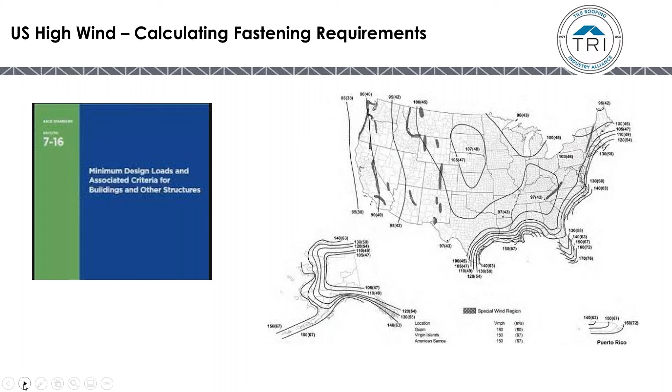For the rest of the country, other than Florida, including Alaska and Hawaii, we are still using the TRI concrete and clay installation guides, and they are still based on 7-10. There's a reason for that that goes into the International Building Code, but they have not made tables for ASCE 7-16.

So if you're outside of Florida and you want high wind, then you can go ahead and use this manual and use the existing 7-10 tables. They also have 7-05 tables in there, and on pages 77 through 98 are 20 pages for you engineers out there of really good engineering for both ASCE 7-05 and 7-10. It's quite chock full of how roof tile uses an uplift moment instead of a pressure, and how you calculate your fastening resistance to the requirements based on what kind of roof you're putting on.

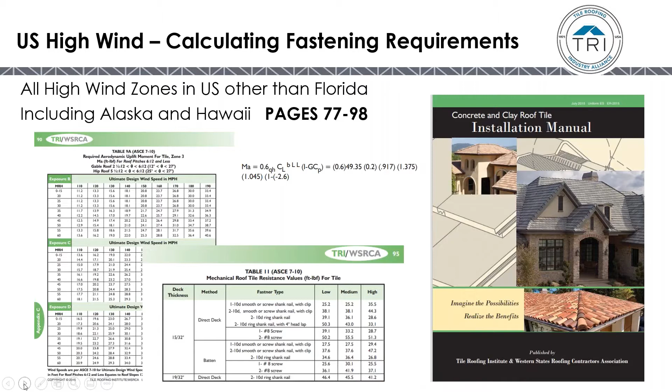That being said, there are other high wind fastening options, and the most popular or the best known outside of the Florida code is the Miami-Dade code. Miami-Dade is basically a code for a given wind speed, 175 miles an hour, and it uses its own installation instructions, described in their roofing application standards, RASs.

You have RAS 118, which is direct to deck, RAS 119, which is a batten system, and RAS 120, which is a foam adhered system. They take the data and have converted it to ASCE 7-16 and put it in a wind table under RAS 127. They then require us tile manufacturers to put in approvals, and not only put in for approvals, but test quarterly our tile to make sure we meet all of their standards.

So it's quite specific. I know in other parts of Florida, engineers and building designers and architects are saying, hey, I don't care about the Florida code, I want you to do my house up in northern Florida using the Miami-Dade product approval. And that isn't equal to the Florida product approval. I'll show you that in a minute.

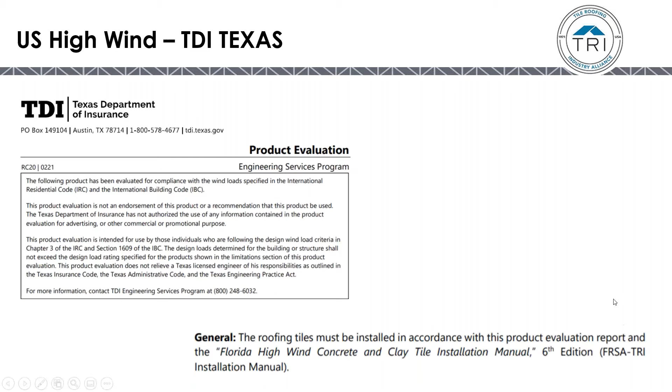And that's the Miami-Dade code. So what I'm showing you here is in Florida, you've got to install to the 6th edition Florida High Wind Guide from the TRI and the FRSA - the FRSA is the Florida Roofers, by the way - or the Miami-Dade code.

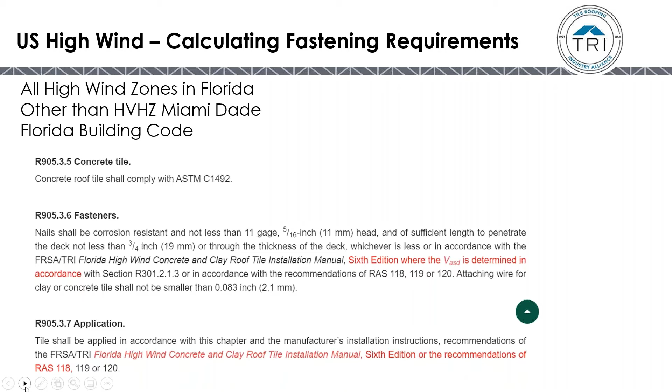For you design professionals, the 6th edition does have 3 pages of formulas and how we figured out how we came across with our tables and such. So it's good reading if you understand all that, but it's in the book on pages 18, 19, and 20.

By the way, you can download the FRSA TRI 6th edition from the TRI website. Just go to installation manuals. And not only do we have the 6th edition, which became effective January 1st of this year - well, actually December 31st of last year - but we also have the 5th edition still there if you want to see, like for instance, a building you did last year, that you would use the 5th edition for.

That would be ASCE 7-10 in Florida, or you could use the 6th edition, which is ASCE 7-16.

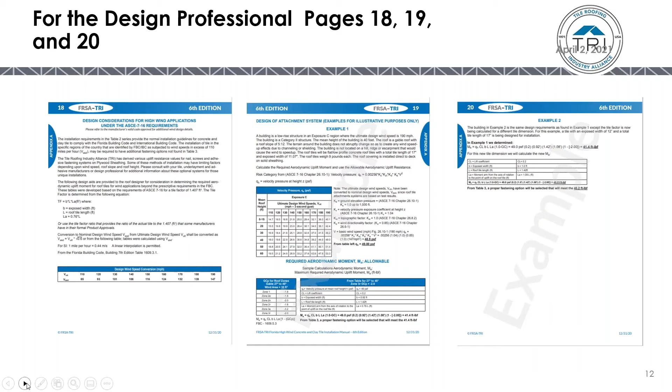The difference with the ASCE 7-16 is the roof zones. In ASCE 7-10, we had 3 wind zones. In ASCE 7-16, we have 10 zones, and the fact that the gable roofs are different than the hip roofs.

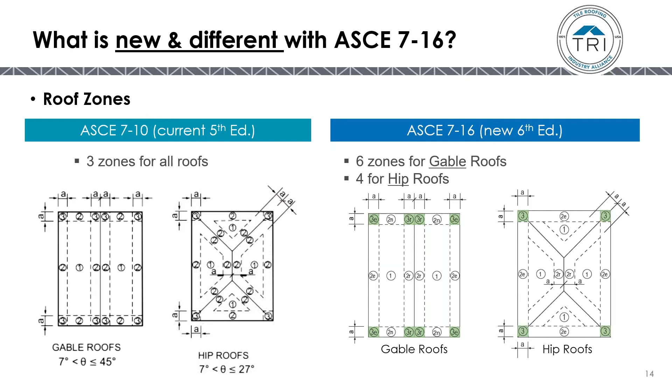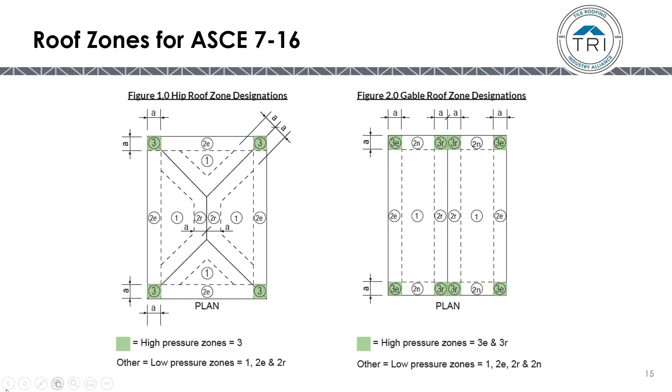The hip roofs have the corners, the 4 corners of the hips, at a higher pressure - this is a better example, I have the high pressure zones - and the gable roofs have 2 different zones: the bottom of the gable and the top of the gable. So that's zone 3E and 3R, and the low pressure zones 1, 2E, 2R, and 2N. So just letting you know this before we go into our examples.

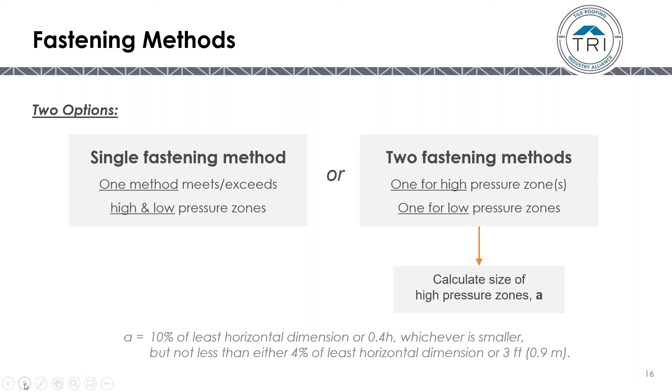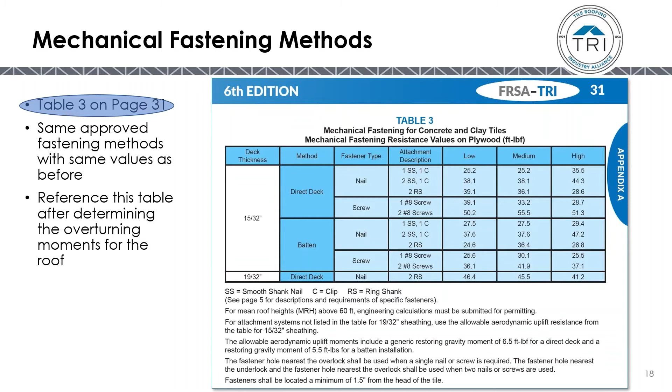All right, let's use the 6th edition and do some examples. It's all based on table 3. We're talking about fastening. So we did testing, taking tile and taking the 3 different types of tile. What we mean by types are profiles: a low profile, which is a flat tile, a medium profile, which is a double roll or small rolling tile, and a high profile, which is the one large hump, typically Spanish type tile. We did uplift tests on that, and we came out with uplift pressures, and those are listed in table 3.

Foam is not listed there. Foam came in after that testing, and they have their own uplift moments. So when you calculate your resistance, what you need, you then go to the foam companies and see what resistance they offer based on patty size and patty placement. So we won't spend too much time on foam, but more and more people are using foam, especially in the higher wind calculations.

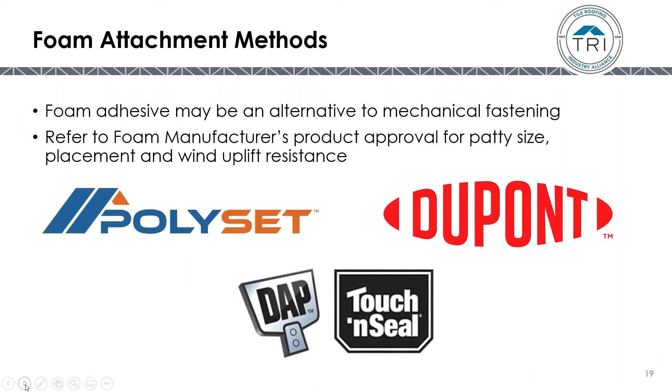Now the tables - we have 6 tables now, 3 for hip roofs, 3 for gable roofs, for each exposure. Exposure B, which is a well compacted area, a very close city area. Exposure C, which is a normal area of housing. And exposure D means you're right on the water. The 6th edition has those exposures defined in the back in the glossary, but for 99% of our roofs, which are exposure C, that's what we're going to talk about today.

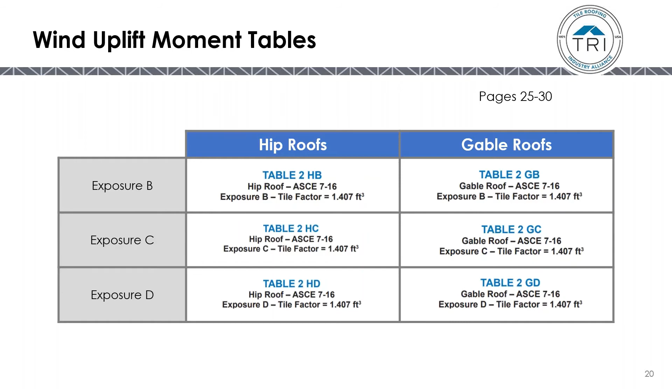Here's what we need to know to do our fastening determination. We need to know if it's a hip roof or a gable roof. We need to know the exposure we just talked about. We need to know the roof pitch. Then we need to know the wind speed. Then we need to know where our low pressure zones and our high pressure zones on that roof are. We need the mean roof height, the halfway point between the eave and the top of the ridge.

Then we need to know what tile we're going to use. We have to look at the tile ratio. I'll get into that in a minute. And then we're going to have to figure out how we are going to fasten it. Are we going to use nails? Are we going to use screws? Or are we going to use foam?

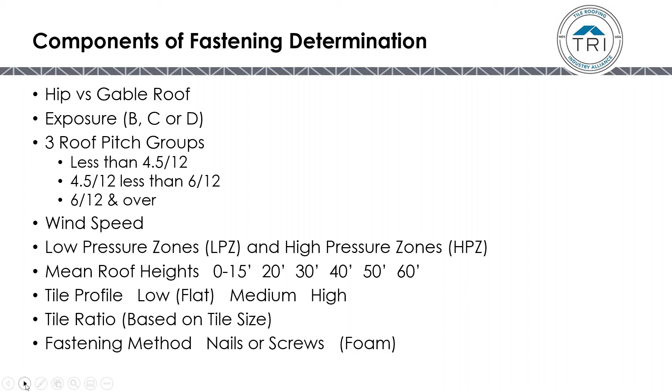Okay, here's an example of the tables. As you can see, the tables are 2HC, 2GC. The difference is the table on the left is a hip table and the table on the right is a gable table. So again, you'll have to look at the roof to determine that.

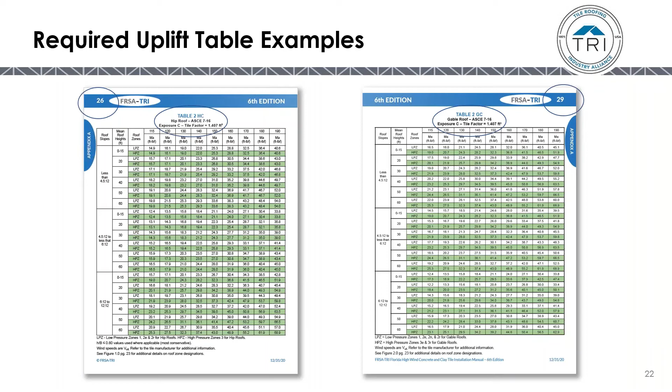So let's look at 140 miles an hour. Here's the example we have for 140 miles an hour, and that includes the mid part of Florida. I didn't want to go too low a wind, and I didn't want to go too high, so I took the medium speed wind of 140. Well, probably some of you people out there think 140 is not medium. In Florida, it's a medium speed. But if you're living in a 90 mile an hour wind zone, that's pretty high.

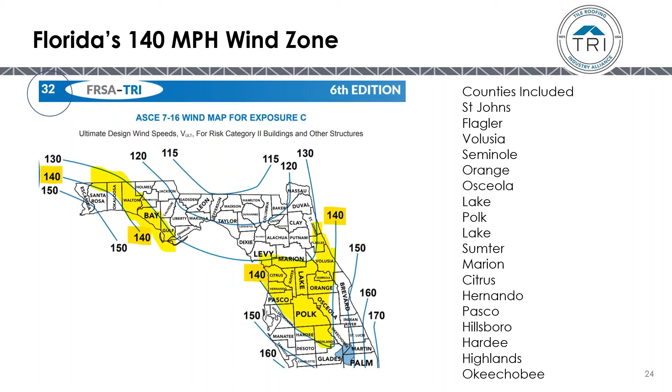But let's do some examples so you can see how this flows. We're going to do exposure C. We're going to do a tile ratio of 1.1. We're going to do 3 hip roofs and we're going to go 3 gable roofs. The 3 hip roofs are going to be at each slope range, and the 3 gable roofs will also be at that same slope range.

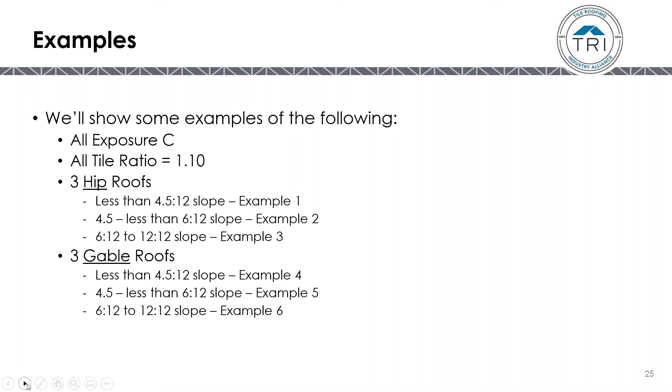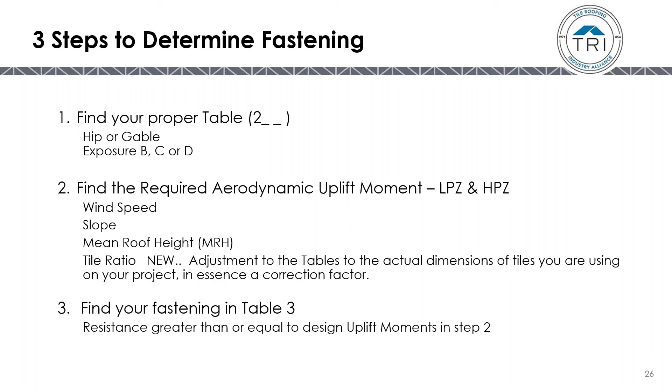Okay, there's 3 steps to fastening. Find your table - figure out if it's the hip table or gable table. Find your uplift moment, and then find your fastening resistance in table 3. So let's start by finding your table.

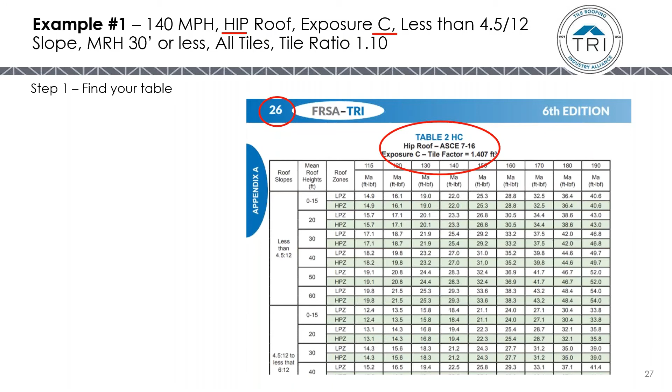If you look up top, example 1 is a hip roof, exposure C, at 140 miles an hour, less than 4.5 on 12, with a tile factor of 1.407. Time to talk tile factor. The tiles used in the testing were a certain size, and we found that tiles will over time get bigger because there are fewer pieces per square. So there comes a point where you'll have to factor in the larger tiles, and I'll show you that.

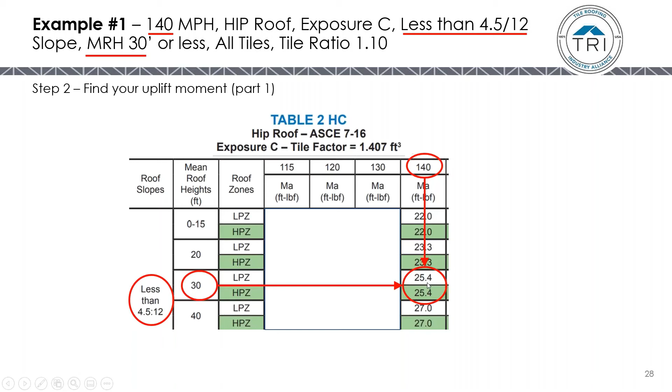But at 140 miles an hour, at less than 4.5 on 12 roof slope, and let's say we have a 30-foot mean roof height, both our low pressure zone and our high pressure zone are the same. That's kind of common in a lot of lower height roofs. So we have to find a fastening system that's going to offer 25.4.

So before we do that, we're going to have to look at the tile ratio, and let's look at the biggest tile out there. Now, a smaller tile would actually give you a lower uplift moment, whereas let's show you an example of the higher one - it takes that 25.4 and moves it to 27.9.

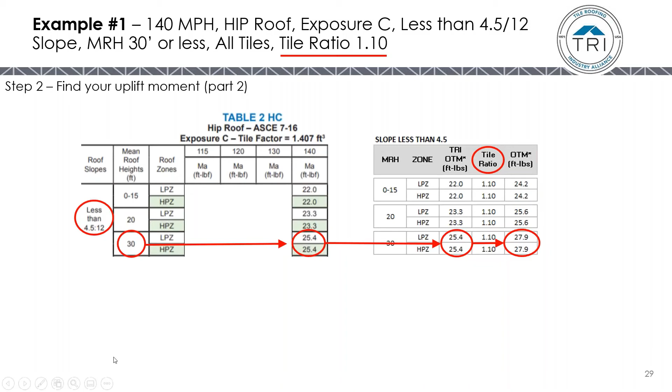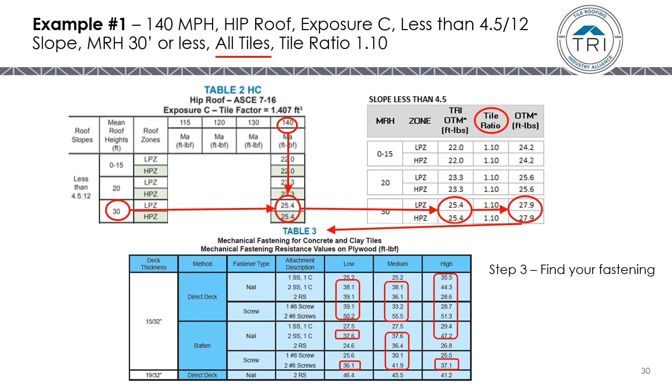All right, so in example 1, 140 mile an hour, less than 4.5 on 12 slope, tile ratio 1.1, we had to meet 27.9. We go to our table 3 and direct deck. Okay, we look at what fastening methods will meet that 27.9, and there they are all listed depending on your profile, your tile - 2 ring shank. Ring shank nails will meet all 3 criteria.

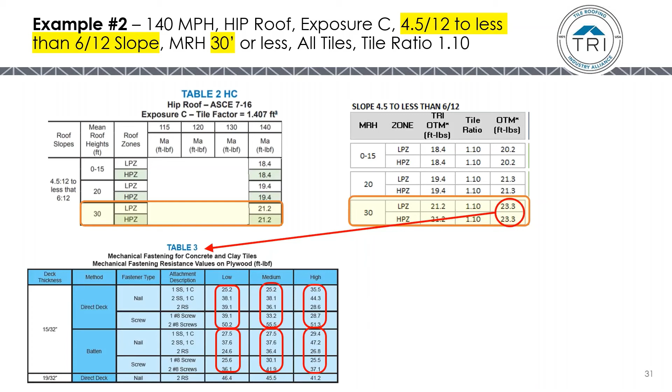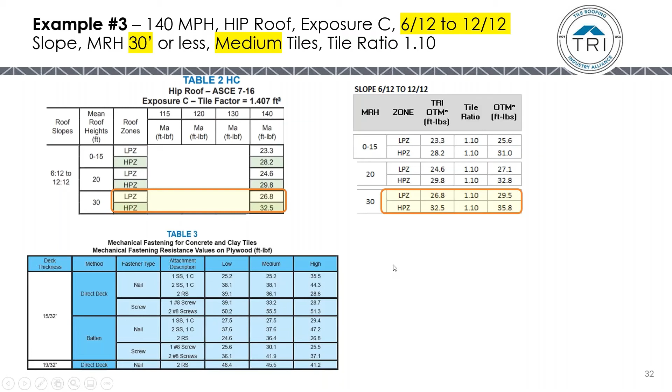And we factor in the tile ratio, and we see the low pressure zone at 29.5 foot-pounds. For instance, in the medium tile, we see that those fastening options will beat 29.5.

When we look at the higher zone, 35.8, not everything meets 35.8. So one screw on a medium profile tile, which is 33.2, it's better than the 29, but it's not better than the 35.

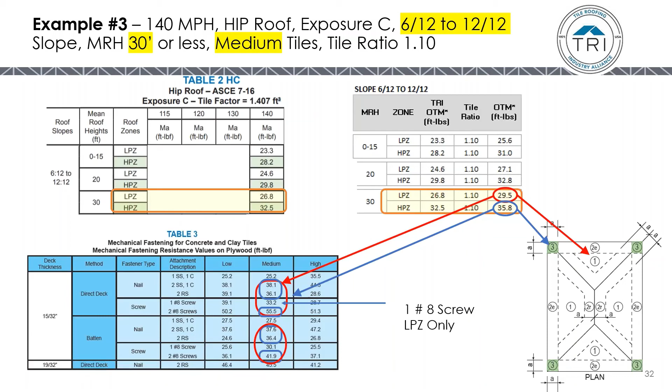So if you do the two fastening method, you can do one screw over the whole roof, but when you go to the high pressure zones, you've got to switch to two screws. All right, going right along.

Example 4 at 140 mile an hour gable roof, less than 4.5:12 slope. You find that this one has a higher value in the high pressure zone. So you take that higher value, and if you have a big old tile, you have to factor in the tile ratio. A smaller tile would actually reduce that number.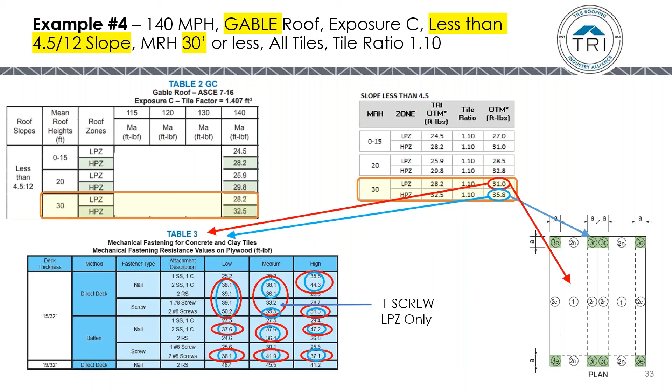So then we look at the higher zones, and the same thing applies, so we've got a combination there. Once again, in this gable roof, one screw will work in the field area, but you'd need to use two screws or some other method, circled in blue, for the high pressure zones.

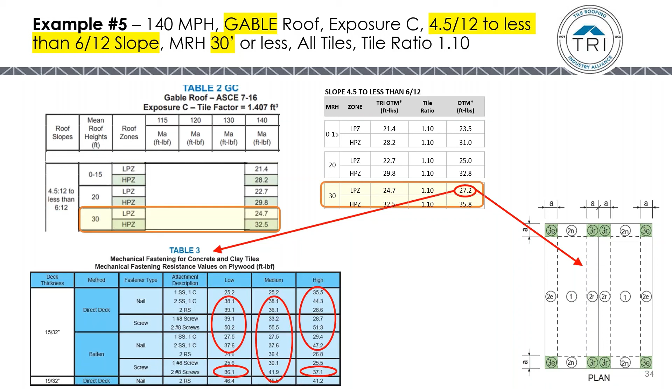Example 5, in the medium sloped range, we again have a low pressure zone different than a high pressure zone. We factor in the worst case tile factor and get 27.2 for the low pressure. We go to table 3, and those are the fastening methods in a gable roof at 140 miles an hour mid slope that you can use.

We look at the corners, the high pressure zones, and those methods are acceptable.

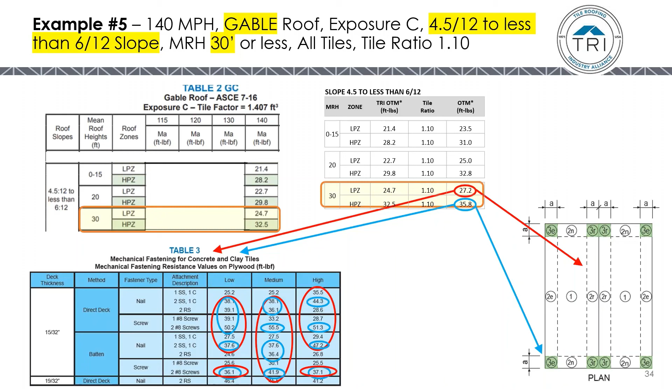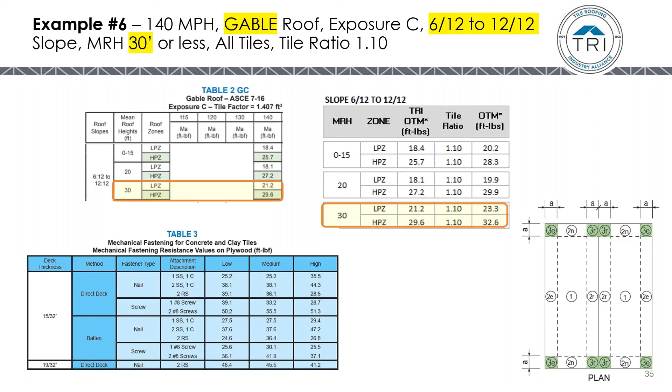And if you factor in a big tile, you get 23.3 for the low pressure zones. You look over at your table 3, and everything will work in the low pressure zones. When you look at the high pressure zones, the corners, pretty much everything works,

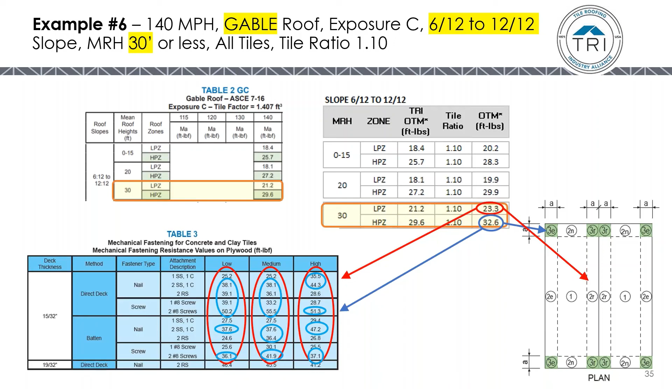but not everything. Two ring shank nails for a high profile tile will not work in the high pressure zones, though it will work in the low pressure zones. So that was my quick take on fastening in the high wind zones.